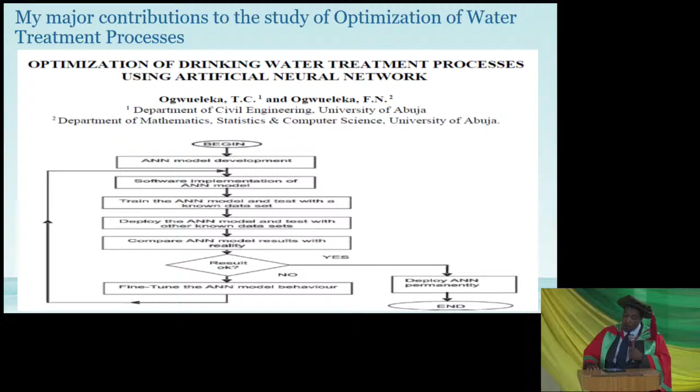The potential of AI in optimizing complex water treatment systems.

Let's look at water stress and the demand-supply imbalance. We have stress when water demand exceeds available supply, which is an indication of pressure on water resources.

Let's look at several factors contributing to this imbalance. One of them is population growth. As population grows, demand for water also grows, so people are putting pressure on water.

Then there's economic growth. Economic growth or industrialization drives higher water demand, both for industry and for energy production and mining. Agriculture is the highest consumer of water supply—about 72% of the freshwater we produce goes into agriculture globally.

The issue of urbanization also affects water stress—the more cities you have, the more pressure on the quantity of water. Another factor is climate change: changes in precipitation patterns and rising temperatures affect water supply also.

Let's talk about sustainable water management systems. These aim to ensure long-term availability and sustainable use of water, while considering the social, economic, and environmental dimensions of it.

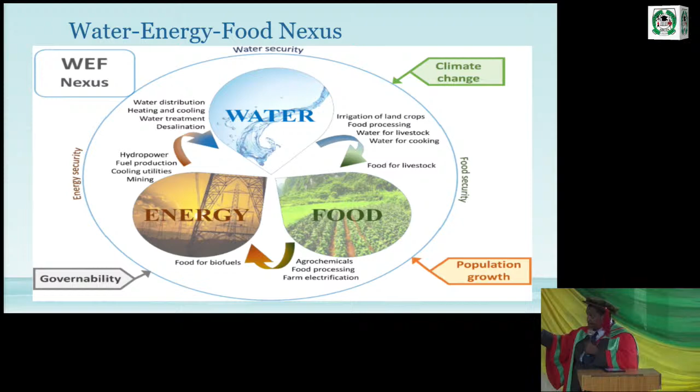The water-energy-food nexus is very important—this is a new concept. Before, we used to treat water, energy, and food sectors differently. Now we're working toward understanding the interrelatedness and interdependency of these different sectors, and in the process, we hope to achieve good outcomes.

We worked on Kaduna River, using 3 years of data. In the process, we were able to identify the correlation and similarity between variables, and classify the sampling sites based on water quality. The findings revealed 3 significant clusters representing groups of sampling sites with similar water quality.

We extended our research after working monthly for about 3 years, extending it to about 5 years. We monitored everything monthly from 2008 to 2012. We also worked on identifying the factors affecting temporal and spatial variation in water. We classified the data into 2 seasons, dry and wet, and identified factors responsible for water quality variation there.

We also worked on Usman Dam, and were able to classify it. We identified the 4 principal components that accounted for 76.31% of the total variance, reflecting the impact of mineral suspension and human-related activity on the river hydrochemistry.

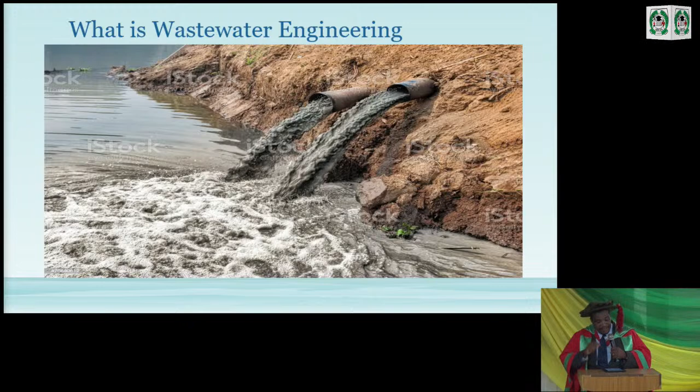You have the preliminary treatment, the primary treatment, the secondary treatment, the tertiary treatment, and then the sludge treatment. All of these involve a combination of physical operations, chemical and biological processes to remove pollutants and ensure safe disposal and beneficial use of wastewater.

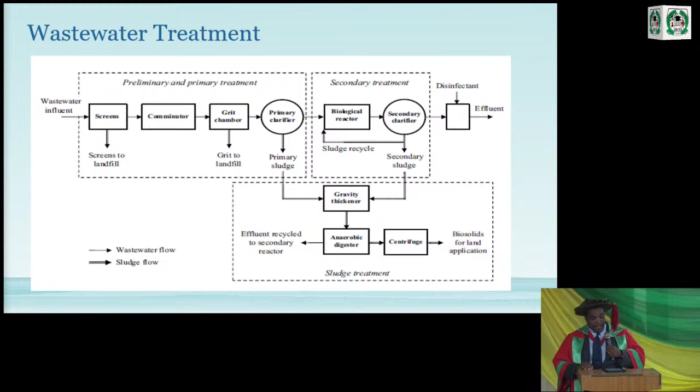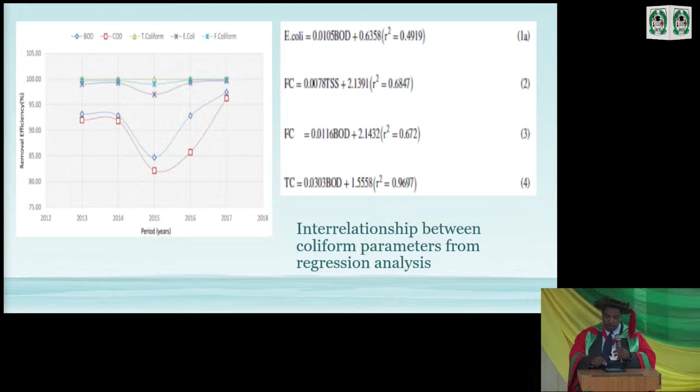We were able to identify a significant correlation between coliform removal efficiency and other constituents: BOD, COD, total suspended solids, and E. coli. The coefficient of correlation ranged between 0.49 to 0.97, suggesting a significant relationship between different wastewater constituents. You can see the regression there. We also took the same data forward to analyze and forecast the performance of the wastewater treatment, which will be part of the wastewater treatment discussion here.

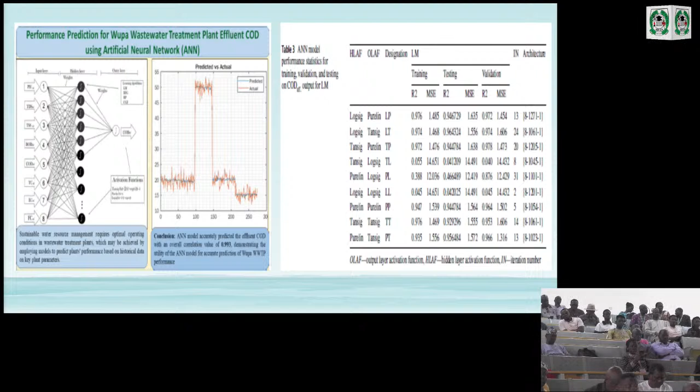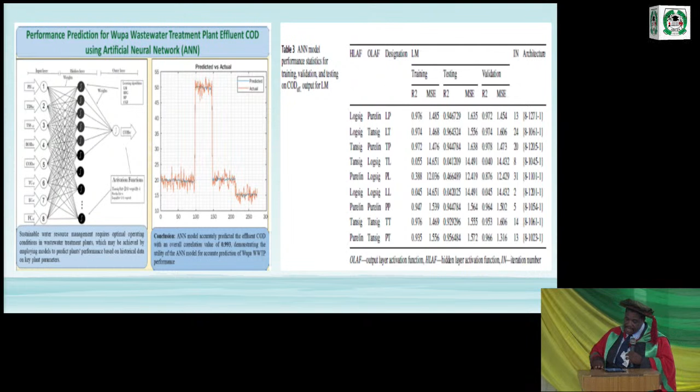So we use different methods. You can see many algorithms here. We use about 5 algorithms, and we're able to identify the one that has convergence, with the criteria we're using: convergence speed and prediction error. So at the end of the day, we got LM, that is the algorithm of artificial network.

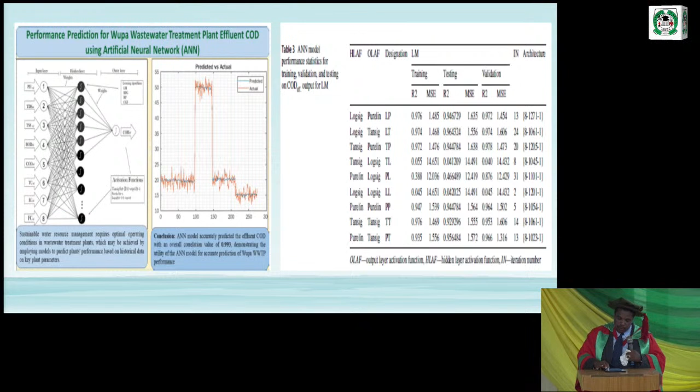So we use it, and we're able to achieve a coefficient of correlation of 0.96 and mean square error of 1.556. So the research demonstrated the usefulness of artificial neural networks in accurately predicting the performance of wastewater treatment plants. These are all high impact factor journals, CV and the rest of them.

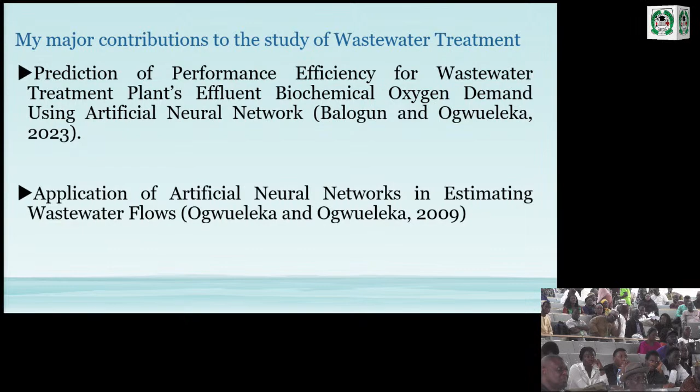So we also worked on prediction of performance efficiency using BOD. And also, for your information, we worked on this method. You can use this method, the artificial network, to estimate your wastewater flow. So you don't need to be checking every day. You can use this model to be checking your wastewater flow.

So let's look at the importance of the water treatment plant. It plays a very crucial role. Remember when I told you that about 80% of wastewater you have globally, we discharge without treating, and because of that, they pollute the ecosystem. So it plays a very important, crucial role in protecting human health, preserving the environment, and also promoting sustainable development. Very, very important, you know.

So because if you pollute the ecosystem, you're still going to take water from that ecosystem. So in the process, we worked on this. We studied the influence of treated wastewater and heavy metals on the soil. We're able to advise, and we came up with the need for adopting improved sewage treatment processes that will eliminate the toxic materials you have in the treatment plant.

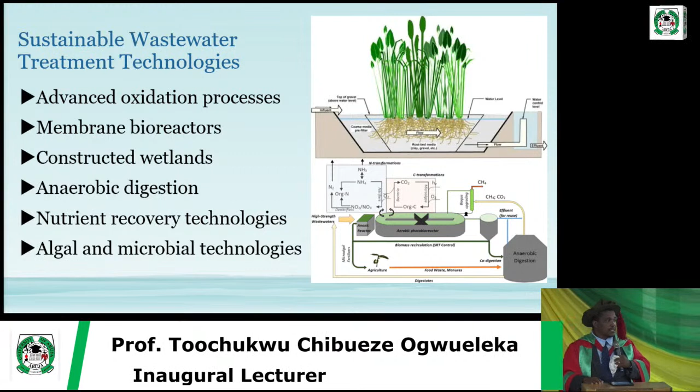And also we can use what we call anaerobic digestion, which most of you are familiar with. At the end of the day, you produce biogas, and that biogas we normally use. Biogas is methane and carbon dioxide at the end of the day, because it's anaerobic digestion, in absence of oxygen. We have that. So also you can recover nutrients from wastewater.

Wastewater contains, among the popular ones, nitrogen and phosphorus. Also we can have that. Also we have ongoing research now on algae, using photosynthetic microalgae to treat wastewater while producing biomass. And this biomass, presently we are using to produce fertilizers and diesel. So implementing sustainable wastewater treatment technology not only improves water quality but protects the environment and promotes resource recovery and energy efficiency.

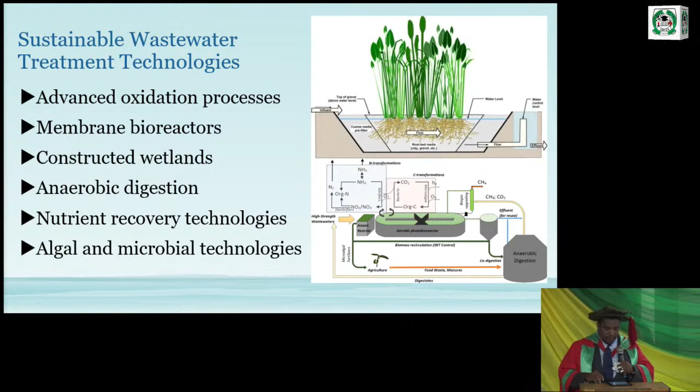So we worked on this. This is a Springer publication. We looked at the effect of hydraulic retention time on microalgae activated sludge. Here we use a batch regimen, batch scale. We produce that, that's a photo bioreactor. We produce that. So at the end of the day, you can see the graphs we got there.

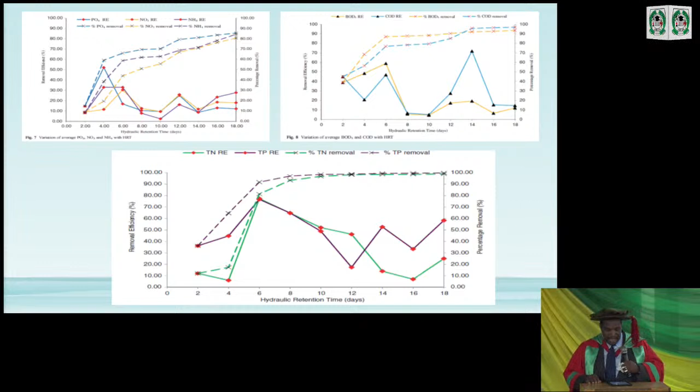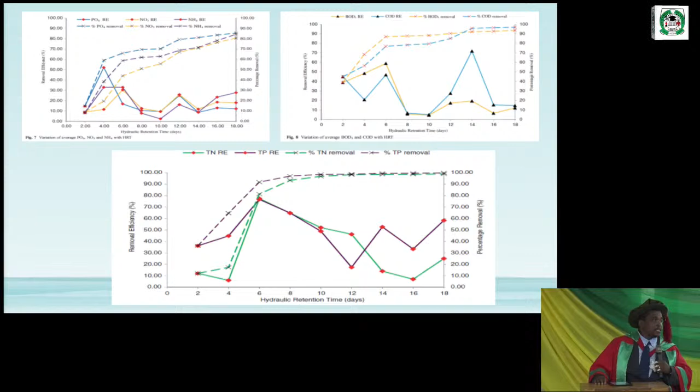So there was a general decline. There was a general decline in total phosphorus, and a general decline in total nitrogen and phosphorus. So these are what you have there. So at the end of the day, we discovered that using the microalgae-activated sludge method is far better than the conventional method we presently use in FCT.

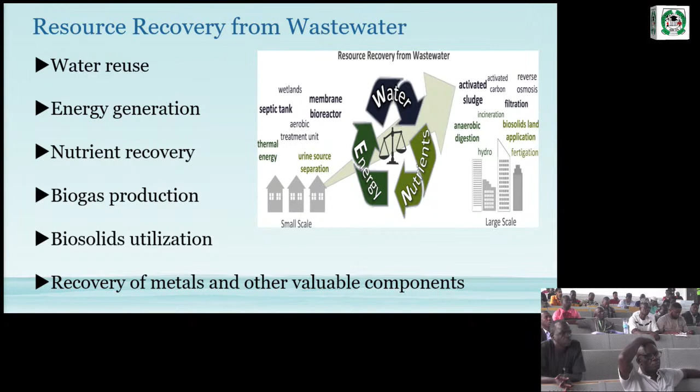So another thing is that when we talk about resource recovery from wastewater, we are talking about the process of extracting and reusing valuable resources present in it. Here we're talking about water, energy, and nutrients. So when you talk about water, we're talking about water reuse. We can use the water we have for non-potable purposes. And then we talk about energy; we can generate energy from a wastewater treatment plant.

We can do that. Also, wastewater contains, like I mentioned before, nitrogen and phosphorus, so we can do some nutrient recovery there. And then we use nitrogen and phosphorus for our fertilizer, that's what we normally use. And also, you can have anaerobic digestion of organic matter, where you can produce methane and carbon dioxide. Then also the issue of biosolid utilization.

Biosolid is just organic matter remaining after wastewater treatment. That's what we have there. You can also process it for fertilizer. And it contains trace amounts of metals. We can also recover metals from that.

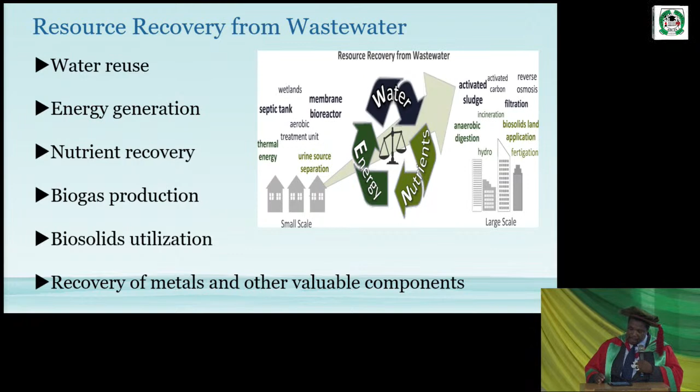As I'm talking about wastewater, now let's look at, we worked on this. Here in the area of bio-drying technology, this is also a study we worked on. So we're able to, the structure is not here.

We find this one very effective in reducing moisture content of sewage sludge and facilitating its disposal. This research highlighted the potential of bio-drying as a sustainable approach for managing sewage sludge, and also contributing to the water-energy nexus framework.

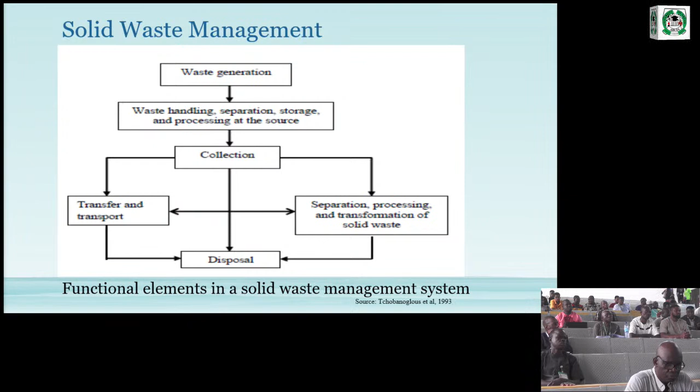So let's move over to solid waste management. You have 6 functional elements of waste management. First, waste generation, meaning creating waste. Second, waste handling, separation and storage, which is what you do in-house. Then the next thing is collection, which is always done by the municipality or any other agency involved. That's it, and you have three routes you can take.

You can apply thermal treatment, that's heat treatment. It can be gasification, it can be pyrolysis. We also have biological treatment, when we talk about anaerobic composting and aerobic composting. So we have many ways. Or you can only have chemical treatment. These are ways you can do that.

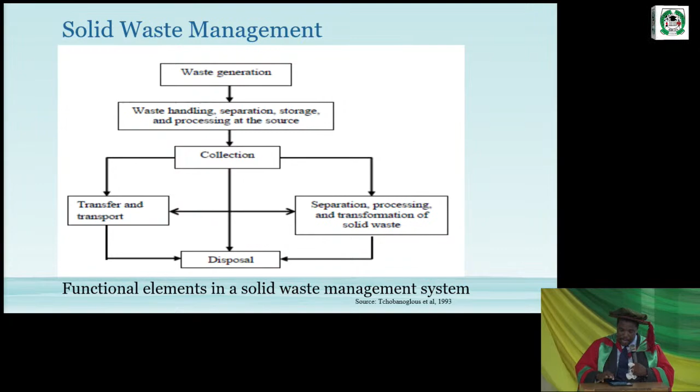I'm rushing because of time, please don't be angry with me.

So these are our contributions to knowledge in this area. We discovered one thing: the collection component, especially in developing countries, takes about 50 to 70% of the waste management costs. So because of that, we went into that.

We did research in the area of scheduling of solid waste collection routes. We worked on what you call the Chinese postman's problem. The Chinese postman's problem is based on Euler theory, from the 18th century. It's a mathematical problem about how you can traverse a route without repeating it.

Because as long as you're repeating a route, you're deadheading, we'll call it deadheading. You're not collecting anything, because distance traveled is proportional to cost. So we were able to look at that theory.

And we introduced capacity there, because waste management is different from just moving around, like sending posts. You have a capacity, and there are two constraints. The vehicle has a capacity; once it's filled up, you can't continue moving. And not only does the vehicle have a capacity, you also have time constraints. So we were able to introduce that theory and work on it.

I worked with that, and then also the issue of arc routing. The second one is based on arc routing theory. We worked on that, and at the end of the day it's a heuristic method. We were able to reduce the number of vehicles, save costs in the area of collection, and also save traveling distance.

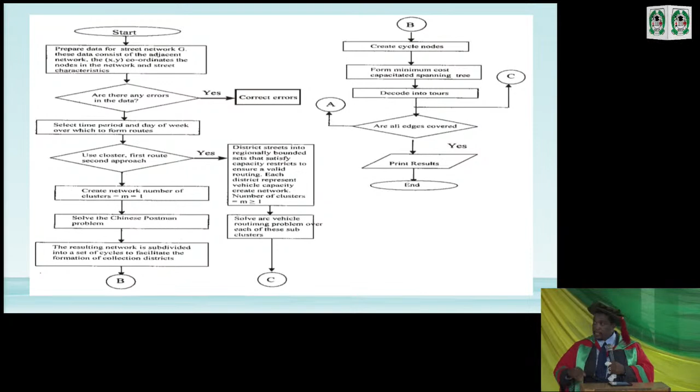Now let's look at circular economy. Our aim is to move to a circular economy where waste is avoided; we keep on using waste. So the question is how do we prevent waste? That is why if you look at most countries with a refinery, they always have a lot of petrochemical companies around them, so that any waste from there gets used.

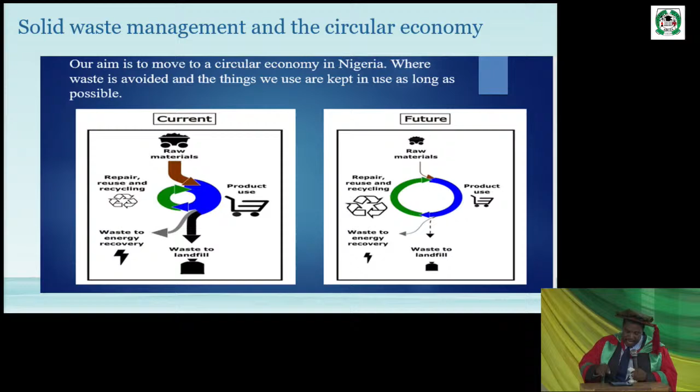So our plan is to reduce the amount of waste we generate, and we're able to do that. By adopting sustainable solid waste management practices and embracing a circular economy approach, Nigeria can reduce environmental pollution, conserve resources, create employment opportunities, and foster more sustainable development. So we also looked at the area of the informal sector.

For your information, in those days we used to call them scavengers. They are no more scavengers, they are waste pickers. You don't use that word, it's not good for them. So we call them waste pickers, and they play a very critical role in waste segregation.

In the process of research, we discovered that only in Abuja municipal we have about 50 recycling centers, plastic recycling centers, and they are illegal. Why are they illegal? They are illegal because they are informal. If you bring them to formal, you can work on them and improve the place. So the research provided valuable insight into the activities and contribution of informal recycling sectors in Abuja, emphasizing the importance of recognizing and promoting this sector for sustainable waste management and socio-economic development.

So we also shed light on the challenges faced by waste pickers in this sector.

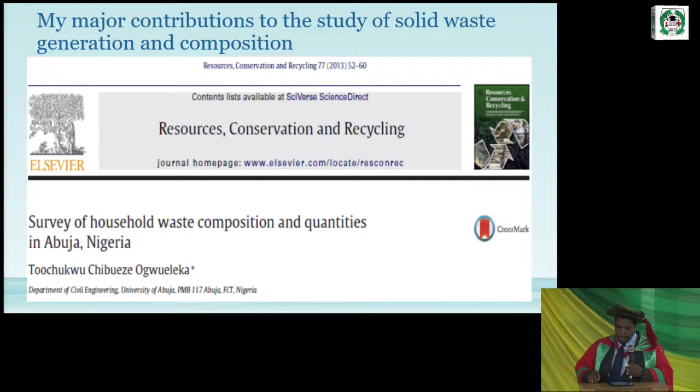Yes, we also worked in this area. One of the best journals we have is the Journal of Solid Waste Technology Management in the US. So we worked on solid waste generation and composition.

Let me tell you the truth: if you don't know the quantity of waste you generate, you can't manage waste. It's very important to know that.

So that's it. Here now we worked in a sector, and we were able to divide the town into 4 sanitation zones. The analysis revealed a high percentage of biodegradable waste there, about 70%.

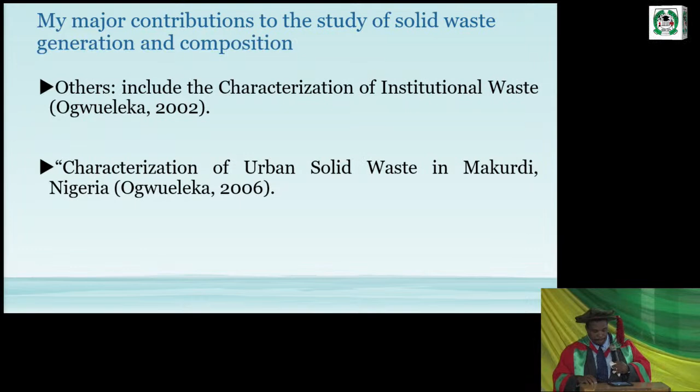Because of time, I did this in Uni-Agri Makurdi. My student is not here, who would have testified. So we did that study in Uni-Agri Makurdi, but because of time we have to rush over.

So let's look at waste to energy here. People are talking about this, it's not the best, but it's an alternative. Yes, waste to energy is not the best, it's the lowest. I'm going to show you the hierarchy - you see, it's the lowest, down there. So we are talking about pollution from there.

But recently I saw one incinerator with very low emission. So here now we are talking about incineration with energy recovery. Here we generate heat, and we use this heat to produce steam, and we use the steam to drive the turbine to produce electricity.

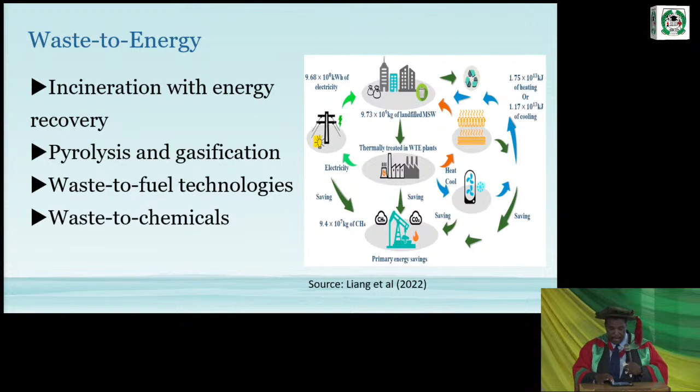That's another area. We also have pyrolysis and gasification - they are all thermal treatment, and they are good systems also. Here we use them to convert organic waste to synthetic gas. That's what you should keep in mind.

And we have several innovative technologies. Just recently, people are working on converting plastic to chemicals and the rest of them. So these are new areas also.

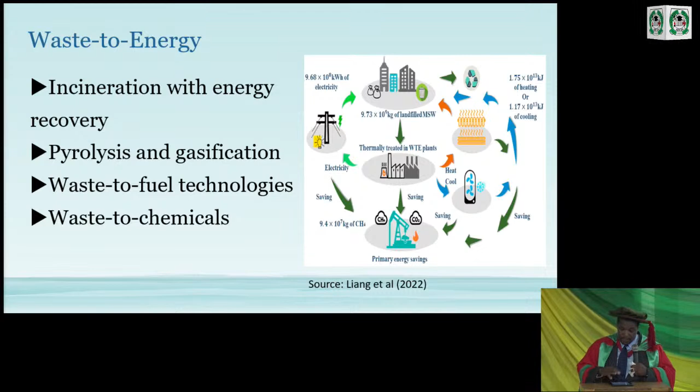Because of that - just like I'm going to show you, someone just knocked his head and said okay, no problem - let me tell you, you don't just come up and say okay, I want to convert this to energy. You must look at the energy content of what you want to convert.

And how do you check the energy content? We have several methods of measuring energy content. We can use a laboratory bomb calorimeter to do that. We can use the empirical method through calculation. And we can use a full-scale boiler to look at the energy content. That's the first thing you do before you start looking at how you can convert that. So we're able to look at how we predict and work on getting energy content, because it's good to know how you can.

We modeled it using 60 data sets, divided into 37 for training and 23 for validating, gathered from Abuja, including plastic, food, and other waste. At the end of the day, the artificial intelligence produced results with absolute average percentage error of less than 9.13 for training and 9.4 for validating. That's the first model. The second one was estimating the heat value of solid waste using neural network also.

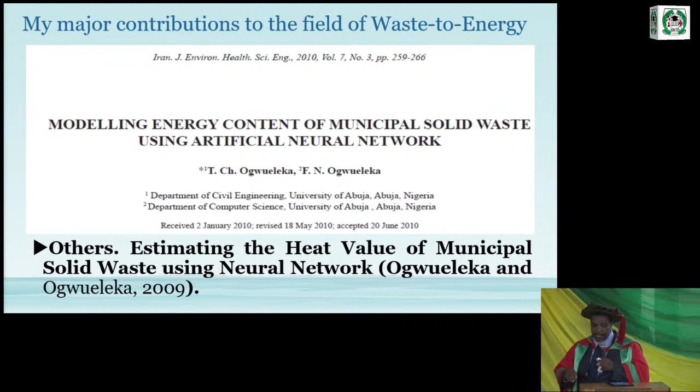So these are, we have so many of them. These are some of our contributions in one of the best papers in the world.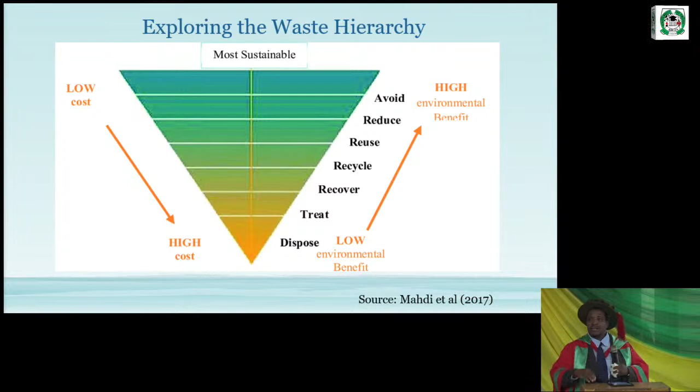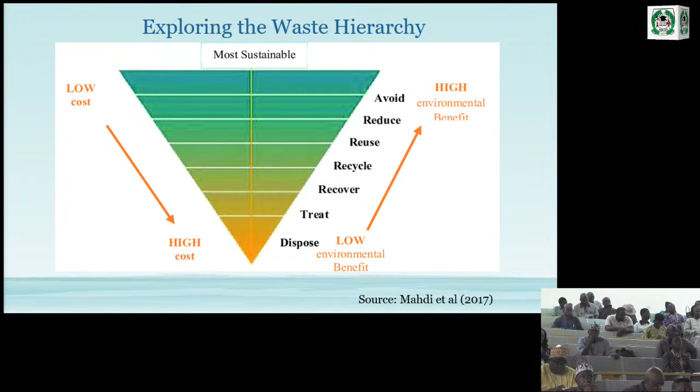So disposal - initially when we discovered sanitary landfill, all of us started celebrating that we had discovered something, and everything moved to what we call sanitary landfill. But along the line, we discovered one thing: in the sanitary landfill, although we have controls there, at the end of the day when you abandon them, we have an issue. Because it produces leachate, that's water from there, and it produces biogas, and we are looking at climate change. Because of that, the emphasis now is don't take anything to disposal again. That's why it's at the lowest level here.

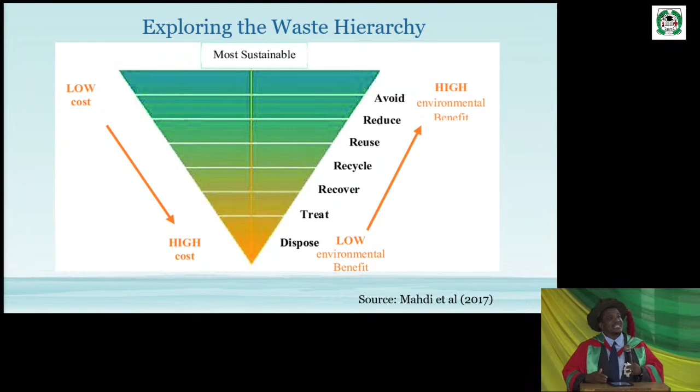At the end of the day, you have leachate that pollutes the groundwater, and biogas that affects the climate. Because of that, it's not sustainable, since the lifespan of a sanitary landfill is normally between 10 and 15 years. So you abandon it and move to another place.

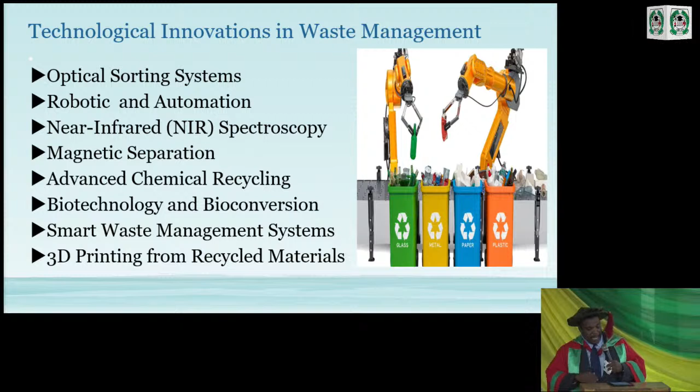So let's look at the technological innovations in waste management. There are a lot of them - we have several cutting-edge technologies which we are applying, like Internet of Things, AI, blockchain, and so many other things. But because of time, I will not go into details on that.

We also worked in high-impact factor journals in the area of fuzzy logic, which is a form of artificial intelligence. We used it to estimate solid waste generation, and to evaluate the optimal number of waste bins in each area. So the approach provided an integrated and comprehensive classification method for solid waste management.

We also worked on self-organizing maps, based on selected variables like population, dwelling, geographic, economic, education, and waste-related factors. We were able to calibrate, validate, and evaluate the whole model using absolute average error and correlation coefficient. We got a correlation coefficient of about 0.982, and an average error of 14.1, indicating high performance and reliability of the model in comparison with the measured data.

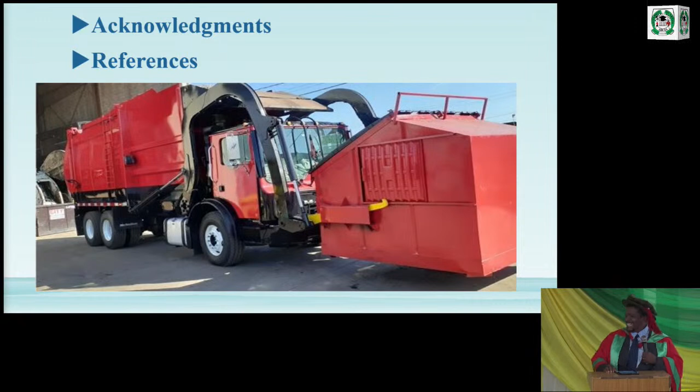Apart from shaping my life, let me tell you, my wife is there - she's a professor of computer science. I always tell her... Yes, she came from NDA. Most of you might not know her - she was the dean, faculty of military science in NDA. She's now the head of department of computer science in this university. I always tell her, when I come back in the next world, I'll find her and marry her. She has been so sound - she's my pillar and support.

I want to appreciate her, and also I want to appreciate my father. My father will be online watching - he had a seizure two days ago and he's in the hospital. He would have loved to be here, but he's watching online because I sent him the link and told him to watch. My sisters are not here because they are with him in the hospital. But I want to thank him, I want to thank my mother for all the effort they made, all the things they provided for me - they gave me the best, even with a little salary. I want to thank them, they're online. I also want to thank my sisters, Ogochukwu, Obinna, and Chinwe, and I want to thank all of them. I also want to thank my uncles, Oliver - they are too numerous to mention - and my cousins, my nephews, and all of them.

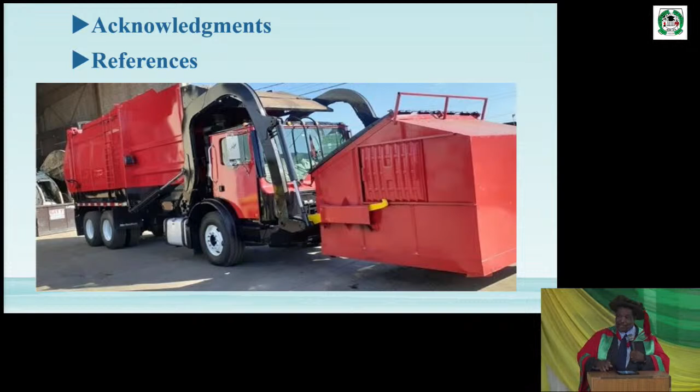Another source of my strength is my mother-in-law - she's a professor also, so I married a professor. And I want to recognize my children there - stand up. And then the other one, that's Tochukwu Jr., that's my namesake. They're all wonderful kids, I want to thank them - they will also be professors.

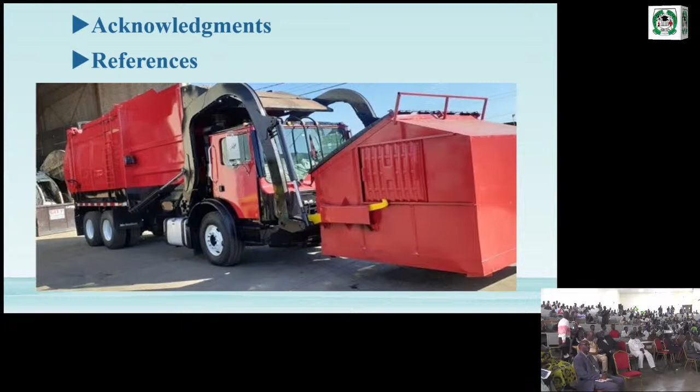That's why my vision is focused on these things. If you don't publish there, you forget about it, you have nothing to publish. It takes time, they criticize your work, but it's better you do the right thing. So I want to thank all of them. I want to thank Akunne Onitsha, that's Professor Ebuniwe. He's late, of blessed memory. He tutored me. I want to thank Professor Ademuliye, these are people who tutored me. And also Professor Agwamba, my mentor. He has done everything for me, and I want to thank him.

And not only that, I want to thank my researchers, my research team, my collaborators, my former students. One is supposed to be here but he said he cannot come. I'm happy for him also. The Minister for Water Resources was my student at the University of Agriculture. I taught him 300 level hydrology, and I taught him at 500 level. He's supposed to be here, but maybe because of office work he didn't come. The new one, they just appointed.

And also I want to thank my colleagues and students in the Faculty of Engineering for the support they've been giving me. I like that. They appointed me, the faculty board appointed me, and they re-elected me again. Can you clap for them?